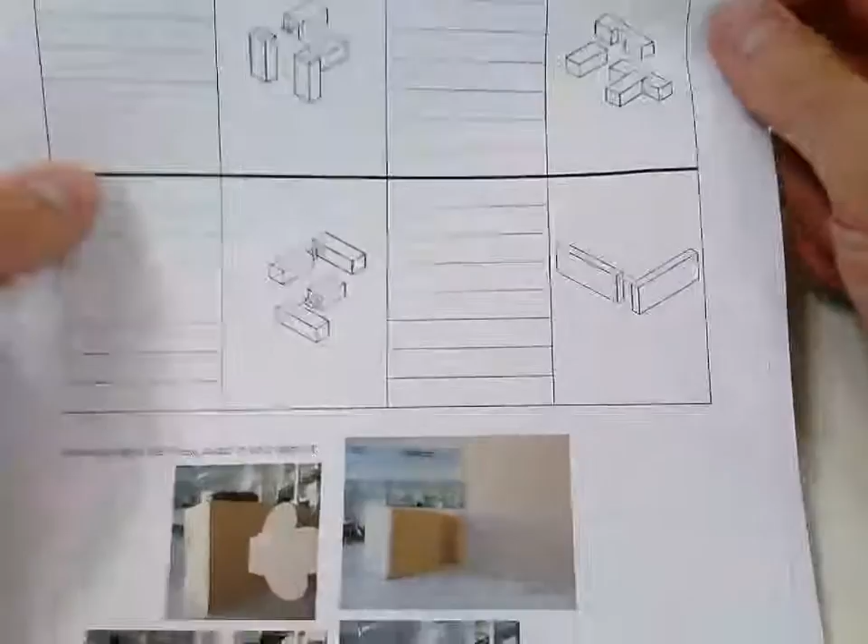And the teacher looking after this class can help you guys get some laptops. So once you've done that, that should probably take you, between that and the specification, the bulk of the first part of the class.

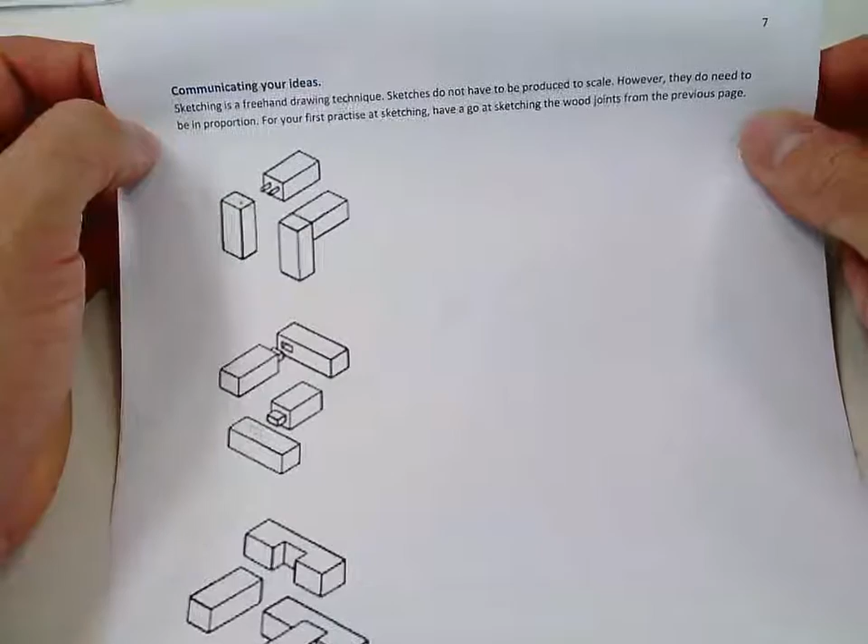For the second part of the class, I want you to work on your drawing skills. What I put in your workbook is pictures of the 4 kinds of joints that you will be making in this class, and your task is to try and copy each of those in freehand. So what I mean by freehand is I don't want you using a ruler, I don't want you measuring all the lines. I want you to see how close you can come to each of those drawings, just drawing.

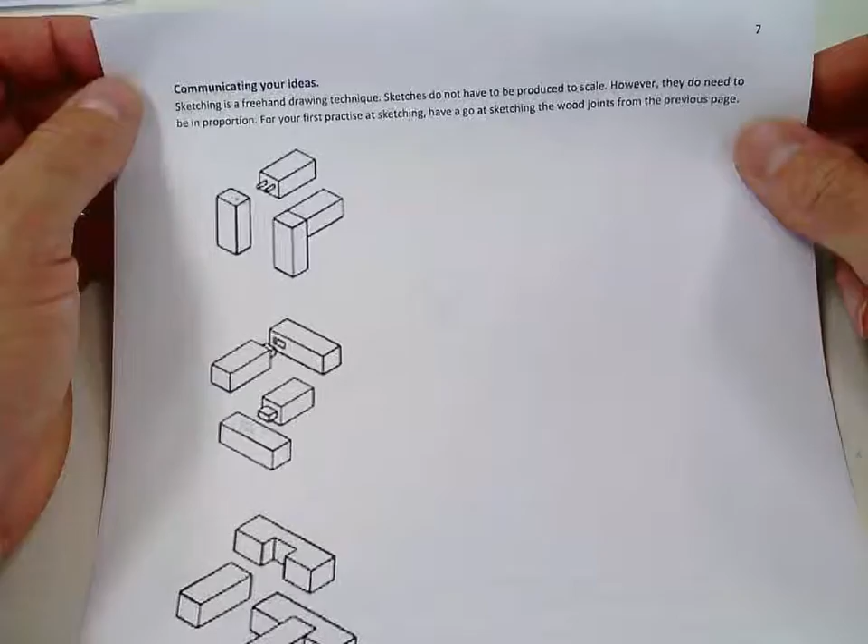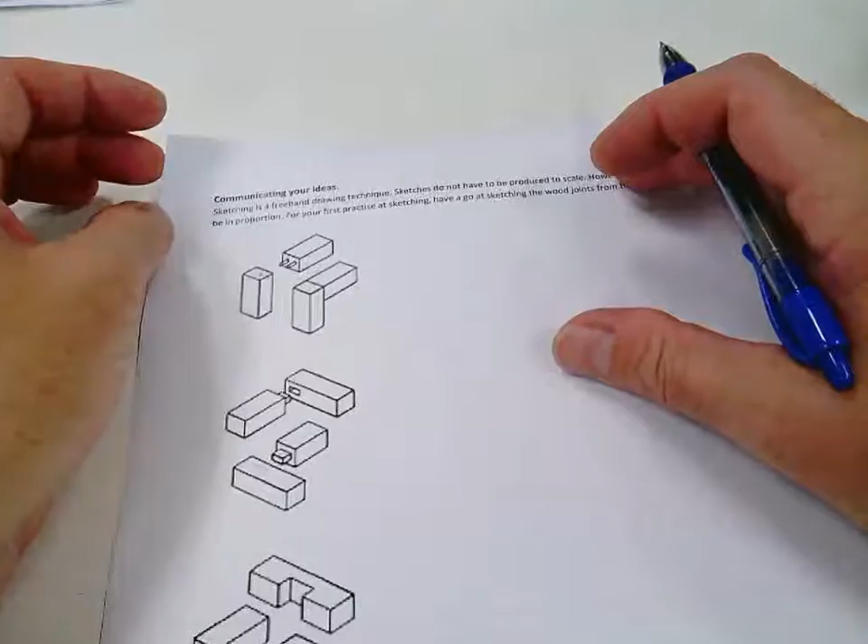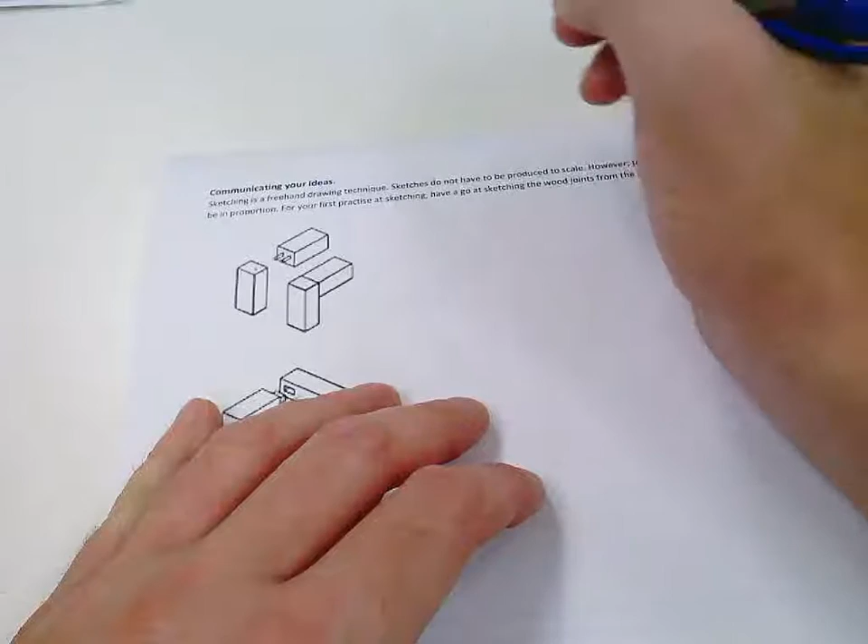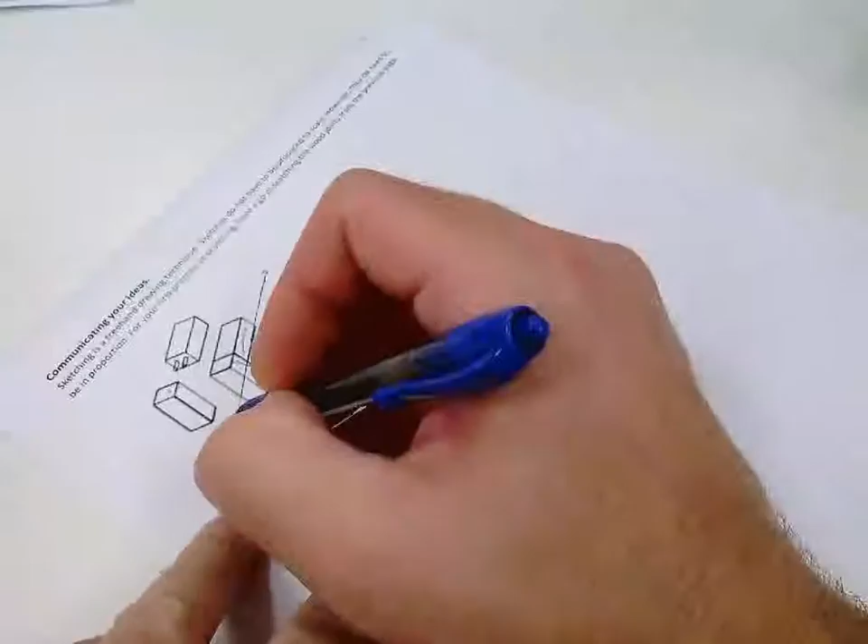Without any aids. So I wanted to give you a few quick instructions and tips and tricks before you start. One of the things you need to notice is that each of these is drawn in what is called isometric projection. What that means is that the front of the object here, it's not actually facing you, it's angled away from you. And because it's angled away from you, the lines here actually are at an angle. So if I draw a straight horizontal line, that's actually 30 degrees. Okay, and then this line up here, it's paralleling it.

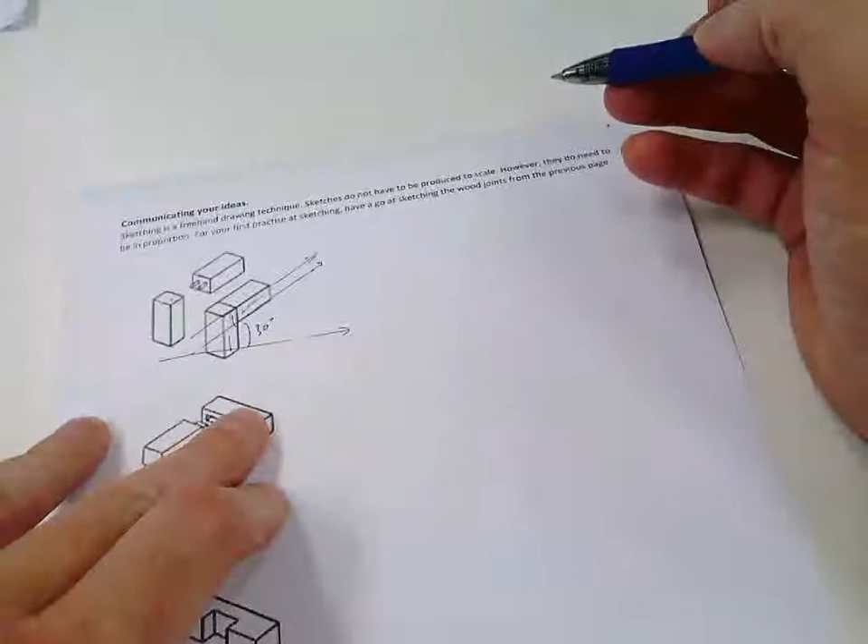Similarly on the side here, the lines for the side are going the other direction.

Okay, and they're also at 30 degrees. The only one that stays the same from if you're just drawing an object that you're looking at is the vertical lines. These guys still go straight up and down.

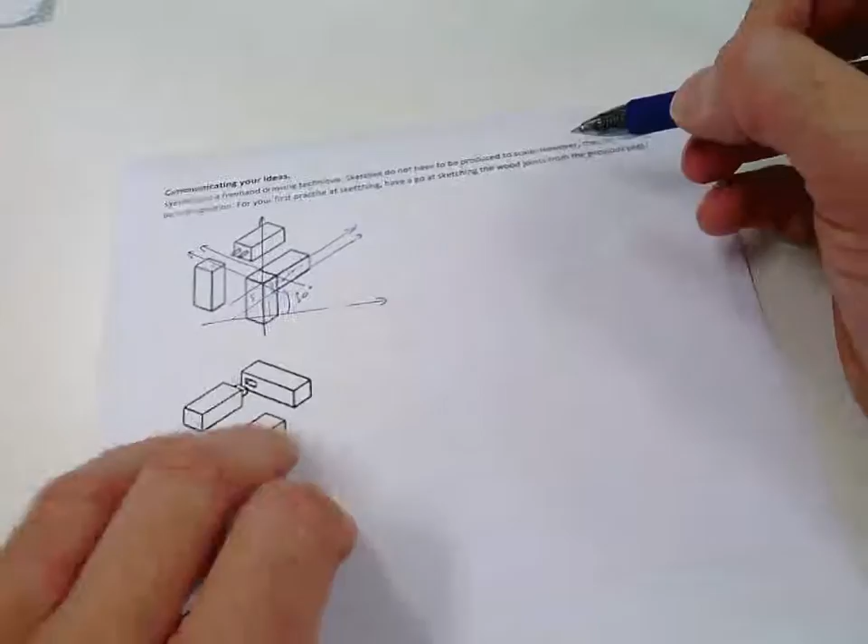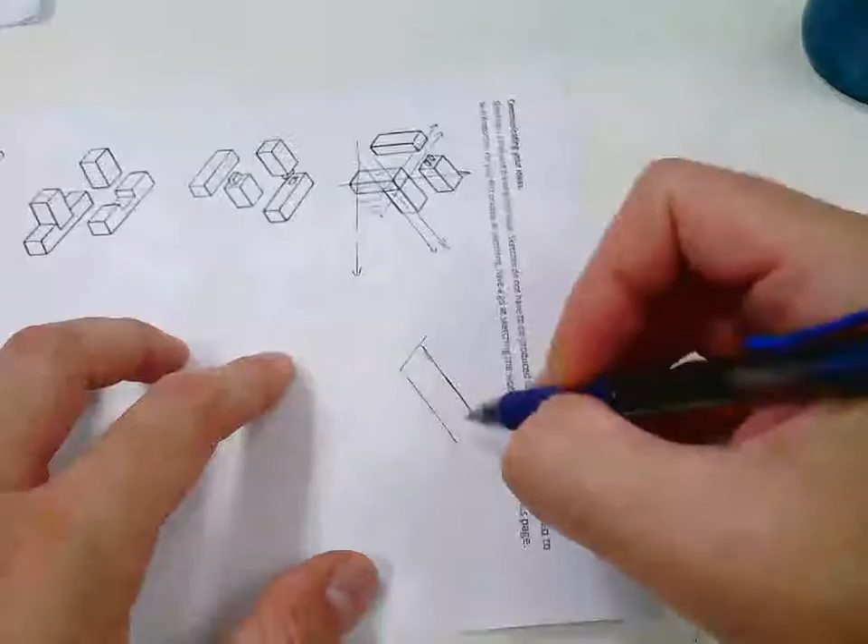So if I was to try and draw this shape here, I would actually start by maybe trying to draw these 2 lines right here. So I might start by trying to draw those 2 lines there, and then I might draw the top like that, and there's that line right there.

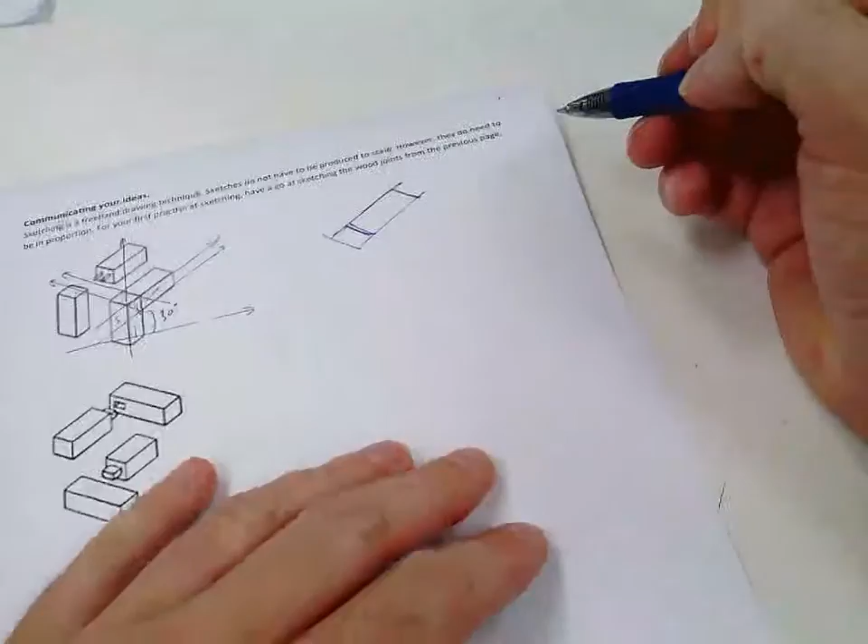Okay, so then I could draw my vertical lines going down. This one's probably the easiest one. It's short. This one's going to be quite short.

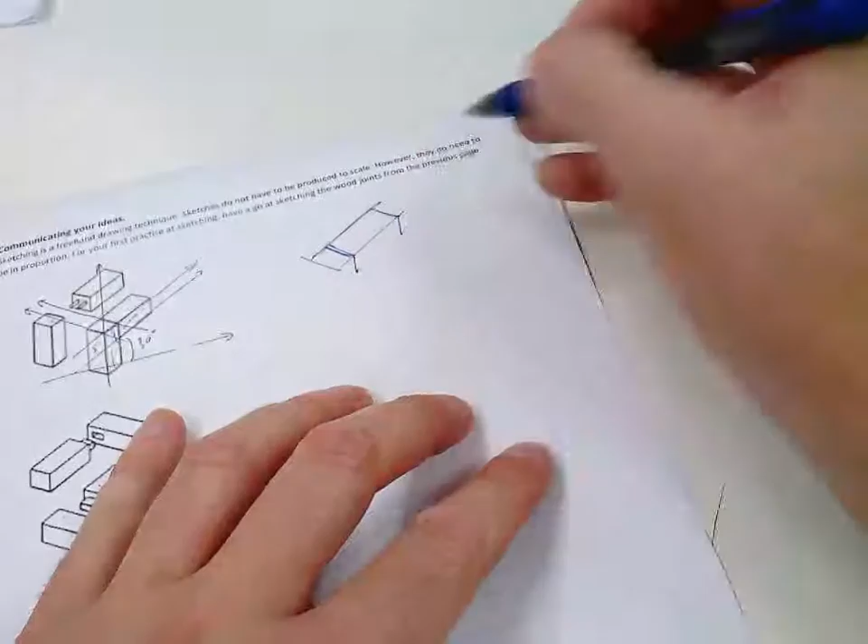So now I could join these 2 up. What I want to make sure I'm doing is I want to make sure that this line is parallel to that line. So sometimes I'll just run my hand over that once, make sure it's going in the right direction. So now that's parallel.

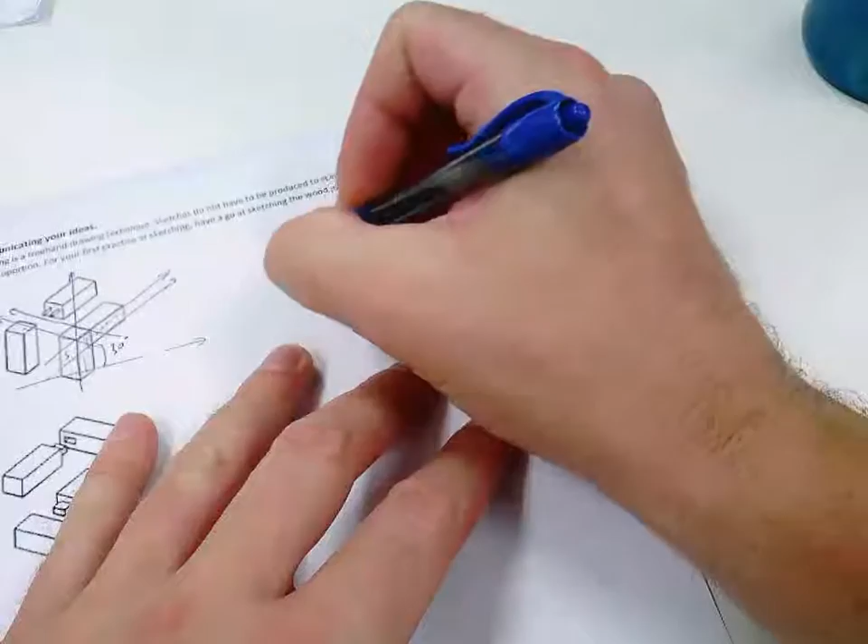And maybe what I'll do now, I'll just go over this a little darker so it's clear. If you're using a pencil, what you can do when you're done is you can erase all of the other lines.

Okay, so now I want to do my lines going straight down. So if that's going straight down, I'll make a line going straight down like that. Another one going straight down like that. And a third one going straight down like that.

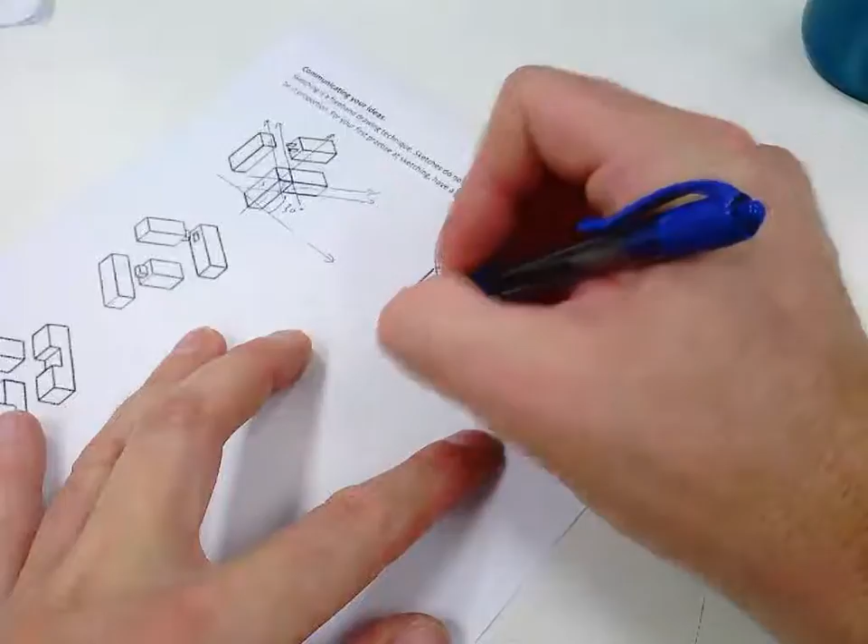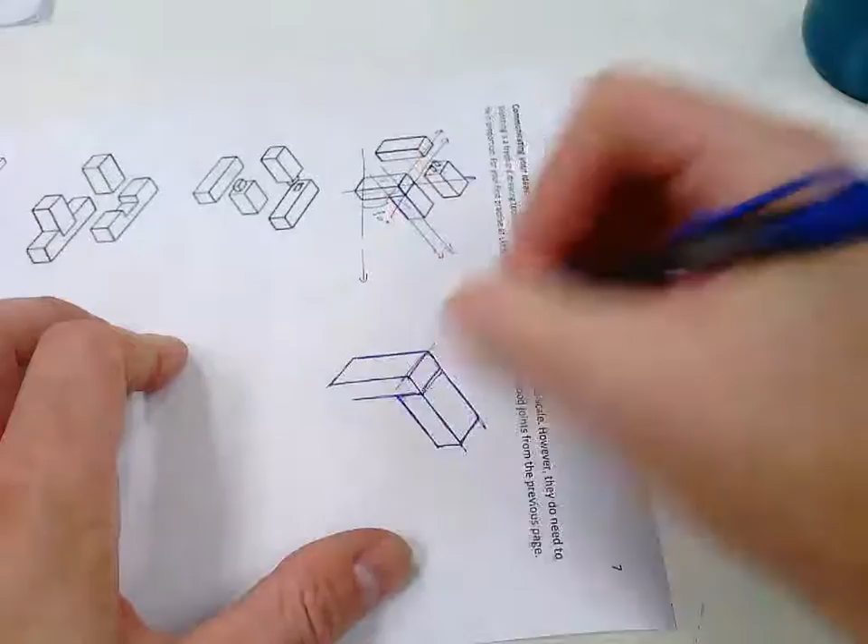Okay, so now all that's left really is to join these up. And what I want to do there is make sure that if I join them up, I'm joining them up at the same angle as the other line, parallel to it. Similarly here, I'm joining this up, I want to make sure it's the same angle. Okay? So that's the general idea.

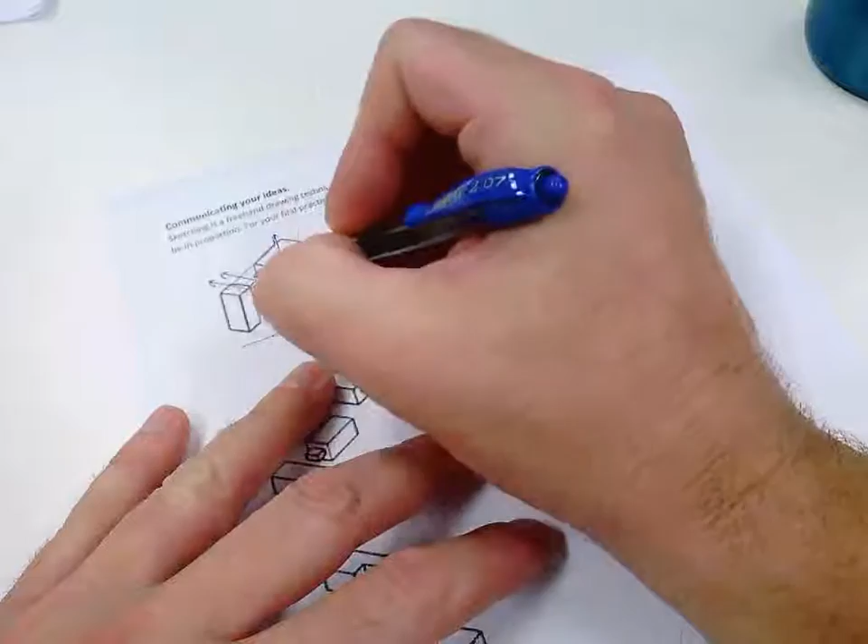For the ones that are apart, what I suggest you do is you actually draw the whole thing here first, and then you can erase those lines. That way they're all lined up. Similarly, for these ones, make sure that these lines are all lined up. Okay, like that.

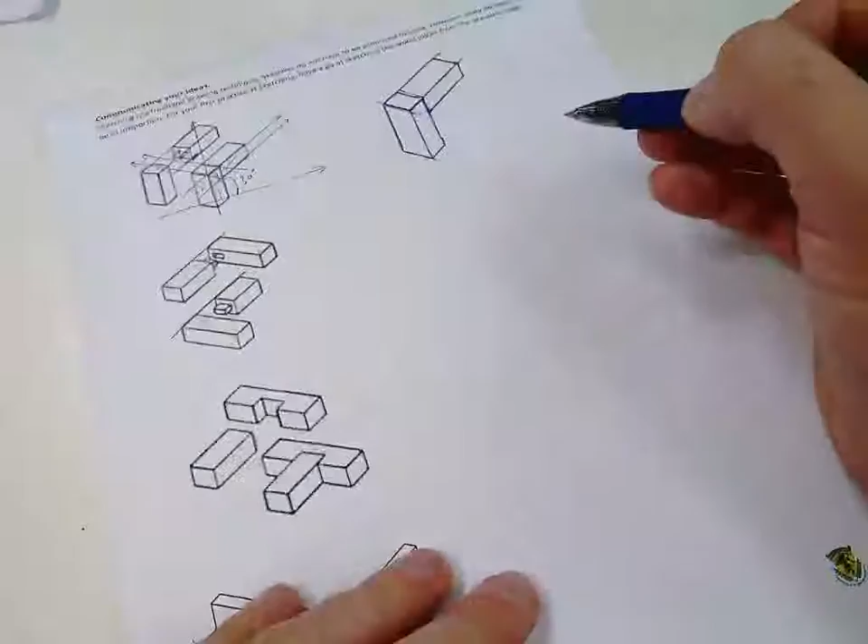And for this one, for your housing joint here, again, you can make sure that your lines are all lined up before you commit to your shape. So do your best. I'll see what you do, how you do when you come back.

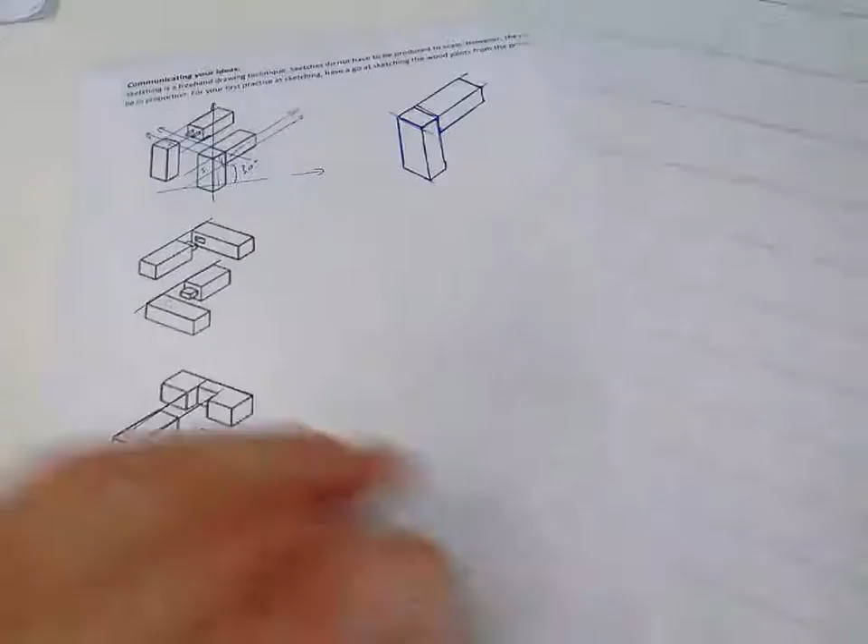If you're having a really tough time with the angles, I have left with your teacher isometric grid paper, which if you're really stuck and you really can't figure this out, get some grid paper from your teacher to help you out. All this does is it helps you with your angles.

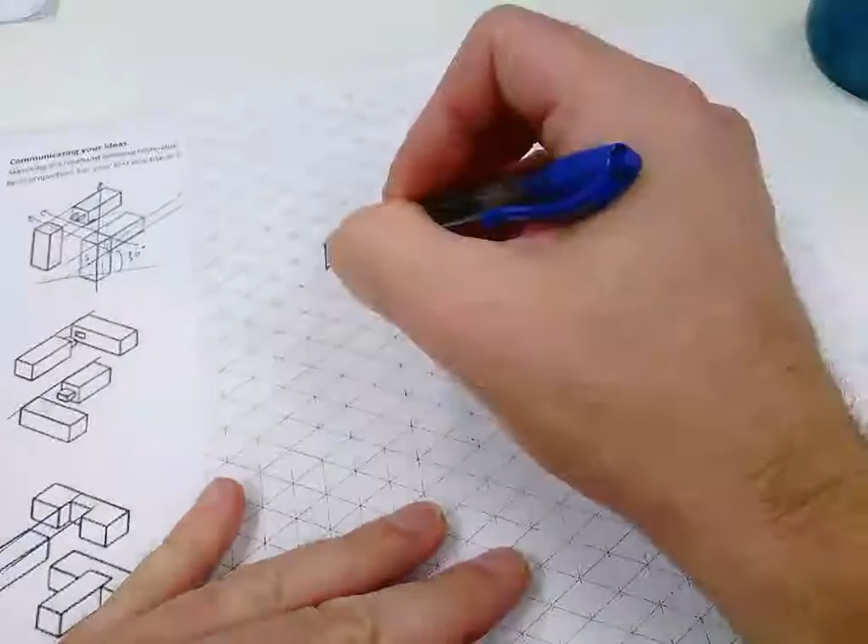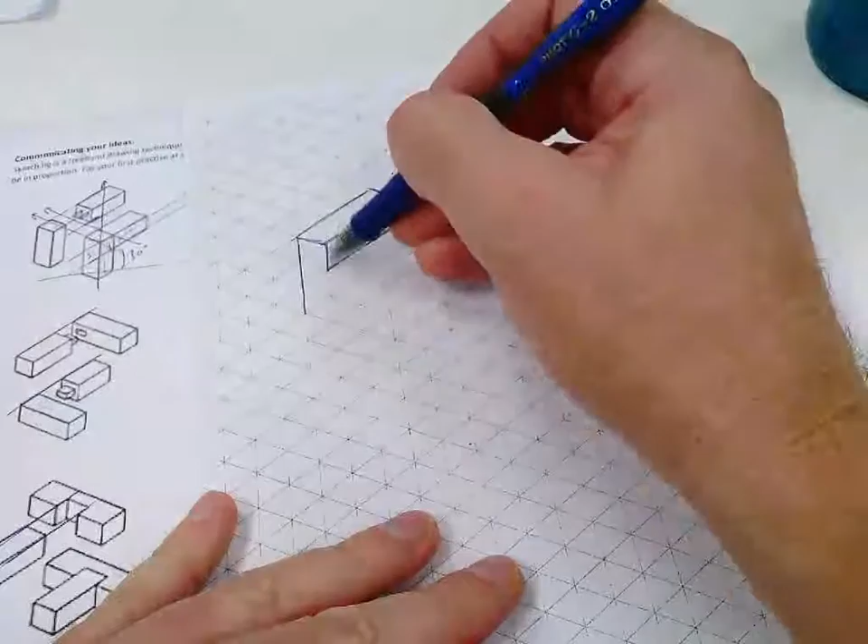So if I'm going here on this line here, I just make sure I'm following the grid. Okay, if I'm going straight up and down, I just make sure I'm following the grid. Okay, if I'm going across here, I just make sure I'm following my grid, and it helps me to make sure that all of my angles stay the same, or good.

Something like that. Okay? So that's your task. So you need to do the design specification, do some research on wood joints, and then spend the rest of the class practicing your freehand drawing. And I'll see you when I get back.